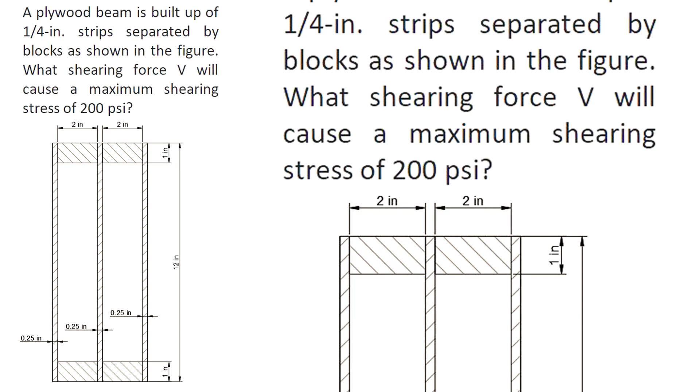A plywood beam is built up of 1/4 inch strips separated by blocks as shown in the figure. What shearing force V will cause a maximum shearing stress of 200 psi? Okay, so shearing stress is VQ over IB.

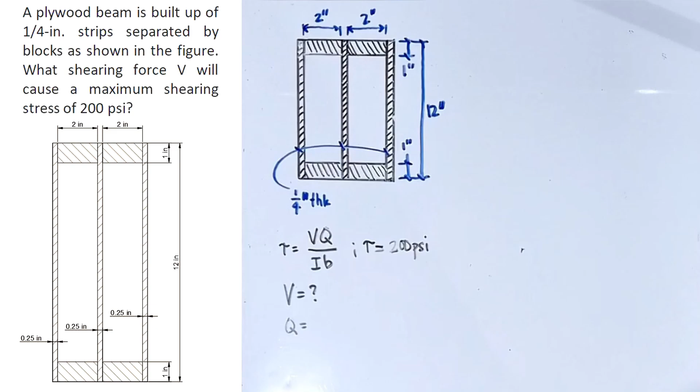So we are asked for the shear force, and we're given the shearing stress, 200 psi. And then we will solve for Q, I, and B. So let's start with Q. Q is the moment of the area above or below where we are going to solve for the shearing stress. In this case, we want to solve the shearing stress at the neutral axis here. So this will be our neutral axis.

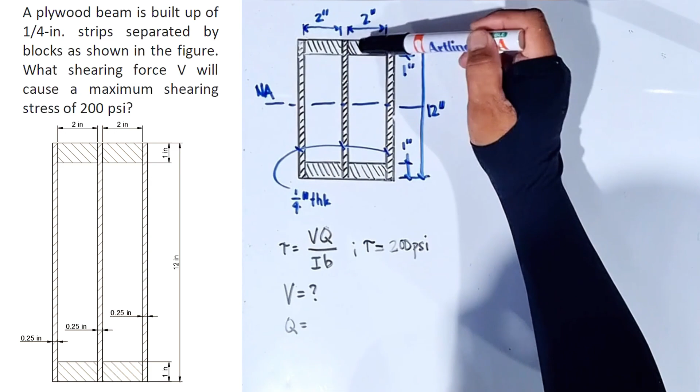There are two ways to solve for Q. One is considering the shaded portion, the upper half of the beam. That's the moment of area of these three strips and the moment of area of these two spacers or blocks. Another solution for Q would be to solve for the moment of area of this rectangle here and then subtract these rectangles here. I think that's what we are going to do.

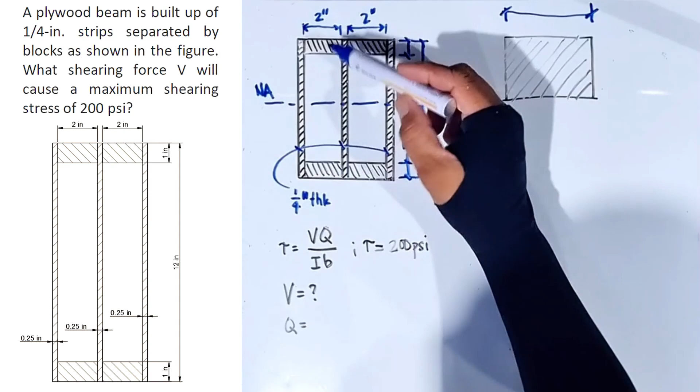So for that, we will need to solve the moment of area of this part of the rectangle. That means we need this as our base. That would be 3 times 0.25, that's 1/4 inch thick, plus 4. So that's 4.75. Again, that's 0.25 plus 0.25 plus 0.25 is 0.75, plus 2 plus 2 will give you 4.75. And then the height would be 1/2 of this, and that should be 6. And then the moment arm would be, of course, at the middle, that should be 3 inches. So in that case, Q is 4.75 times 6 times 3.

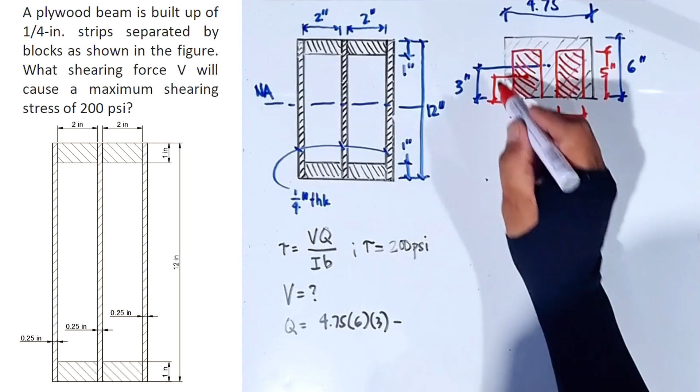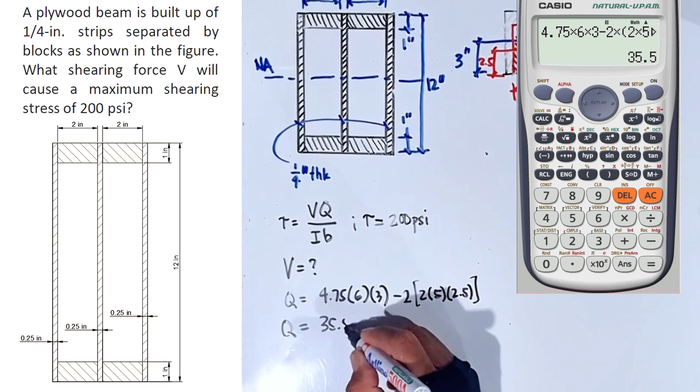Then we are going to subtract this part minus this one. So this will be 2 inches, 2 inches, and the height will be 6 minus 1, is 5 inches. And of course, the centroid will be 2.5 from the neutral axis. So we will subtract 2 inches by 5. The moment arm is 2.5. And there are two of this, so we'll multiply this by 2. So that should be our Q: 35.5 inch to the third power.

Next, we'll solve for I. So for I, it's the same idea. This time, we are going to solve for the moment of inertia of this rectangle, which is, again, 4.75 by 12. So this is the neutral axis here. Okay, so the moment of inertia for that, let's call this I sub NA, is the base times the cube of the height divided by 12. And then we are going to subtract the hollow part of the section, these two rectangles here. So that's 2 by 12 minus 2 is 10. So that's minus 2 times 10 cube over 12. And then there are 2. We will multiply that by 2.

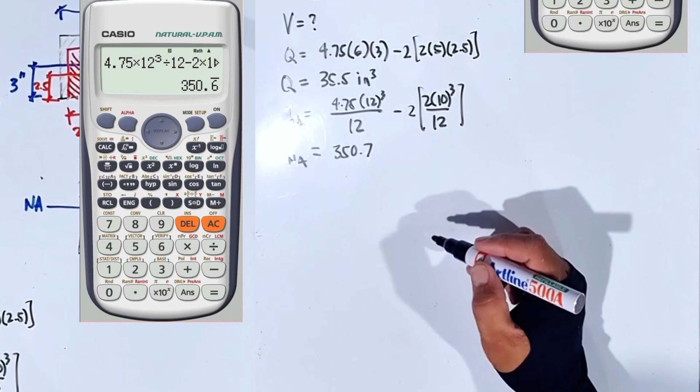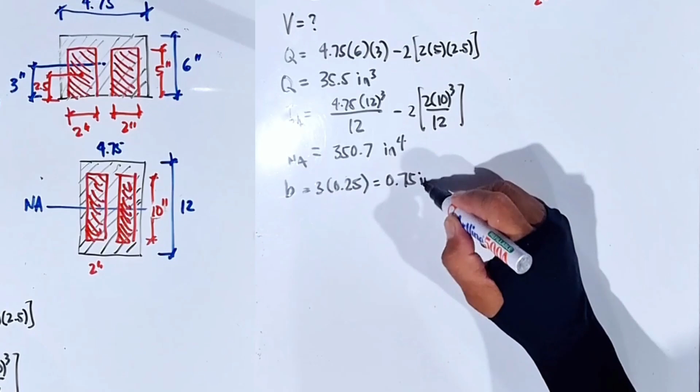Our moment of inertia about the neutral axis is 350.7 inches to the fourth power. And then our B would be that part of the section along the neutral axis. That would be this plus this plus this, or that's 3 times 0.25, or 0.75 inch. So we'll substitute all these values here. From shear stress is VQ over IB. Shear stress is 200 psi, times the unknown V multiplied by Q divided by I divided by B.

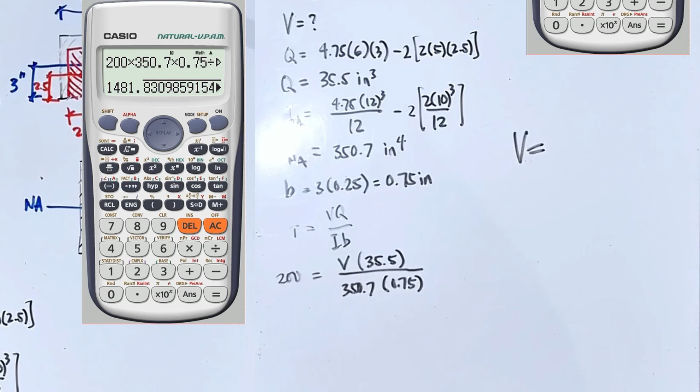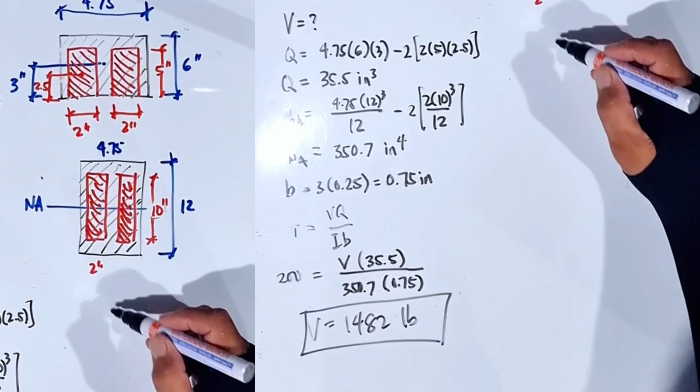Then we get our V equals 1,482 pounds. So another solution for Q, let's write the answer here. Another solution for Q is to solve for the moment of area of this shaded portion above the neutral axis. This one. So this is the neutral axis here.

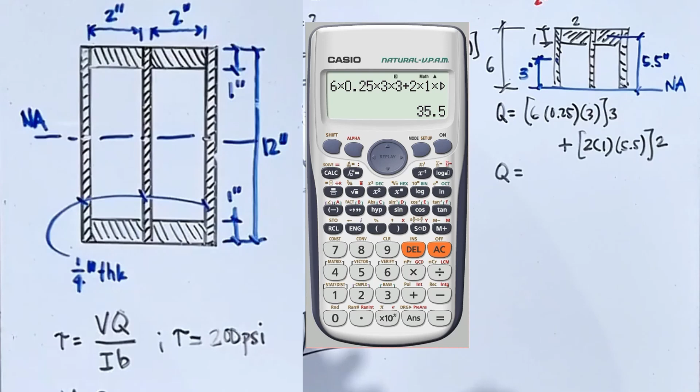Then we need this distance, and that's half of 6. So this is 3. And then we need this distance. That's 1 half of 1 is 0.5. So 6 minus 0.5 is 5.5 inches. So our Q then is, to start with, these 3 plywood strips. That's the height 6, the thickness 1/4 or 0.25, times the moment arm of 3. And then we are going to multiply this by 1, 2, 3. Then we're going to add this. That's 2 times 1, because this is 2 and this is 1. And then the moment arm is 5.5, and then we will multiply this by 2. We should get the same answer, 35.5.

And for I, we can also do this. We get the moment of inertia of the 3 strips. That's the base 0.25 or 1/4 inch. The height would be 12 cube divided by 12, and then we will multiply that by 3. Plus, we'll add these 4 blocks, but we are going to transfer the moment of inertia from here to here by using the parallel axis theorem, or the transfer formula for moment of inertia. So the distance from the centroid here up to here is 5.5. Okay, so we will add the moment of inertia of this block. That's 2 times 1 cube over 12.

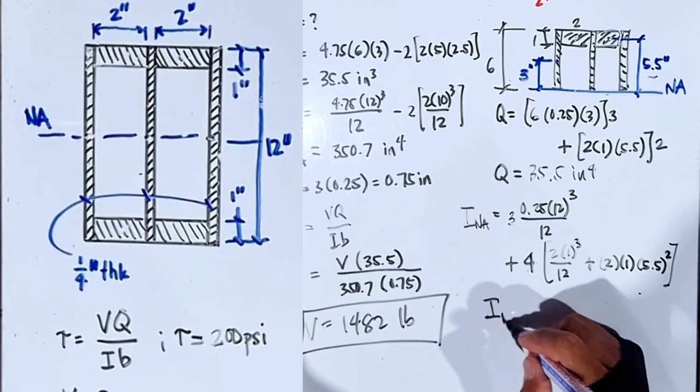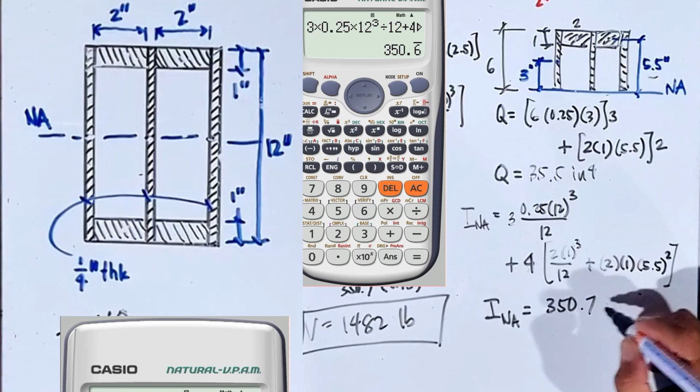That's the moment of inertia of this block with respect to its centroid. And we're going to transfer this to the neutral axis by adding area times d square. The area is 2 times 1, that's the area. The distance d is 5.5 square. So this is area d square. And then there are 4 of this, 1, 2, 3, 4. So we will multiply this by 4. So we should get the same answer as this one, 350.7. So the same as this one, same.